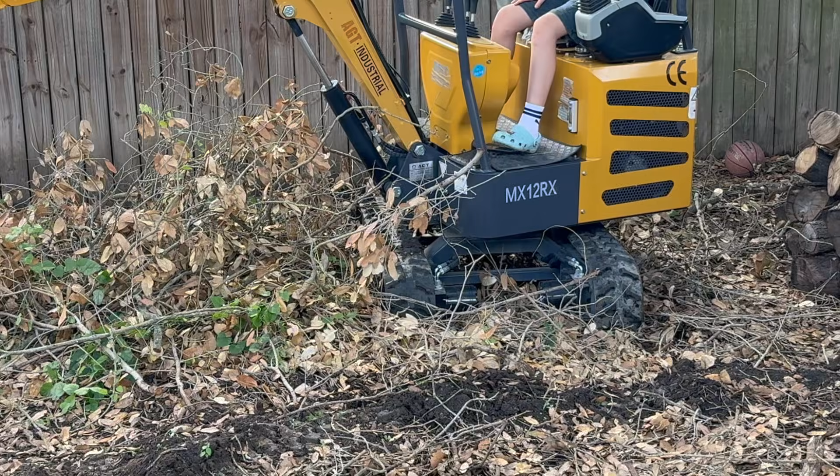All was going well with my cheap Chinese mini-excavator until... And it's spraying. See where I get our newest asset operational again,

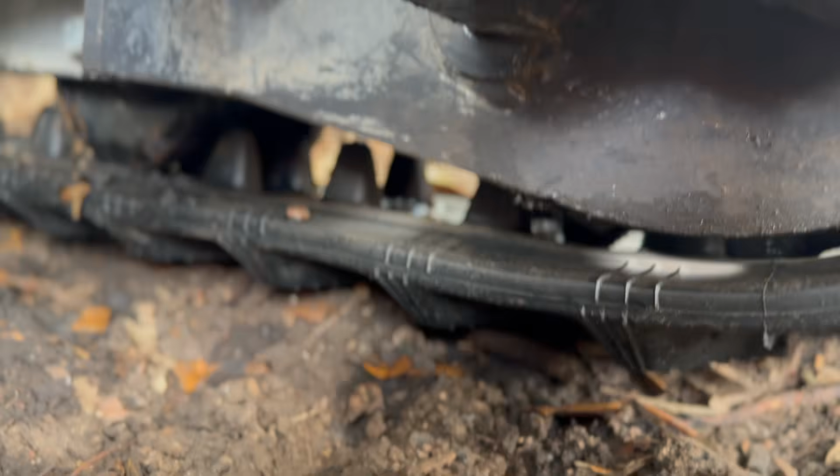With the only technical guidance coming from poorly assembled Chinese instruction manuals and disjointed tribal knowledge passed through Facebook groups, I completely disregarded the post-purchase instructions and immediately let my son play with it. He just pushed it away. With only 2 hours on the hobbs, it started trying to return all of the hydraulic fluid back to the earth via one of the track drive motors.

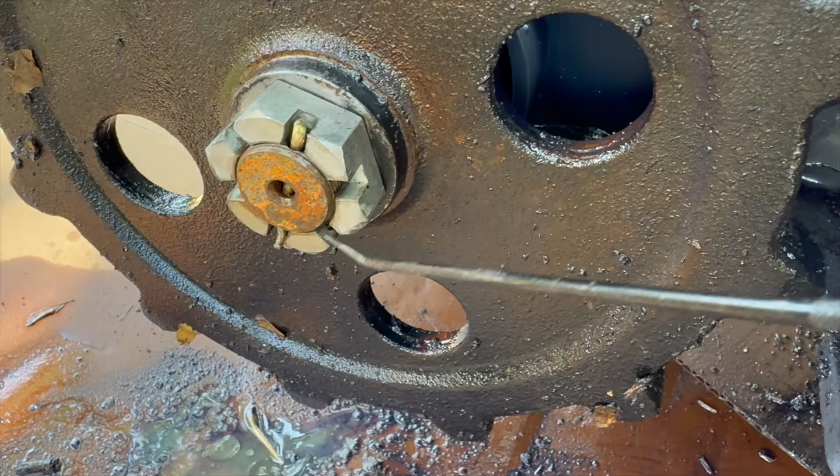That's probably not good. After loosening up the track adjuster and pulling off the track, I started to notice some assembly issues that even had the chickens scratching their heads. This whole thing right here is not bolted down by anything. Yep, no grease zerk there either. If you're trying to think about the right way to do it, it's probably snug plus one castellation. Much better than the factory done with not snug

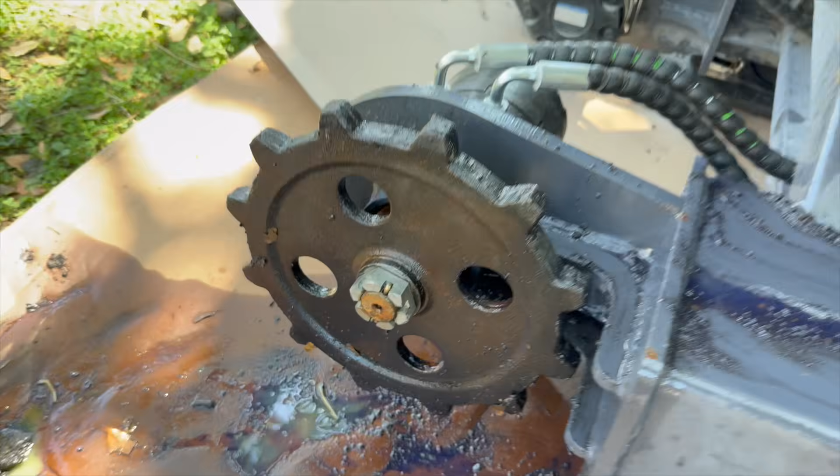at all. Alright, I did not do anything to this except take the nut off, and it looks like it's not press fit on, so that guy just came off by hand. Oh, the keyway is coming out with it. So there's where the oil's gonna be coming from because of the internal seal. Let's fire it up and do a little test.

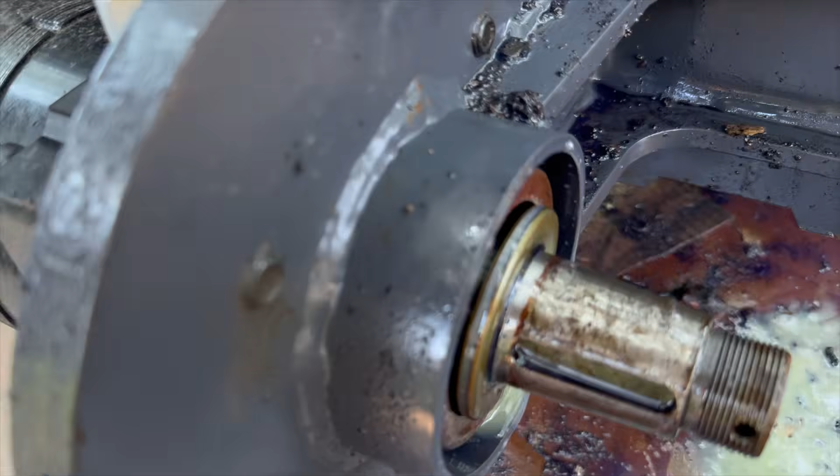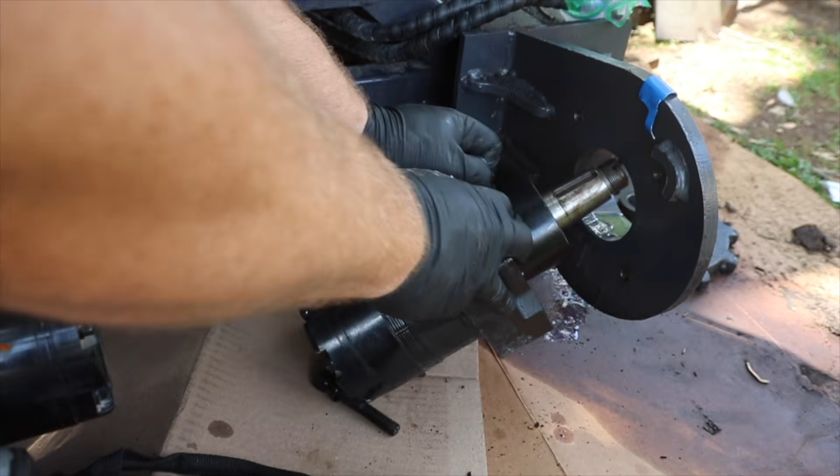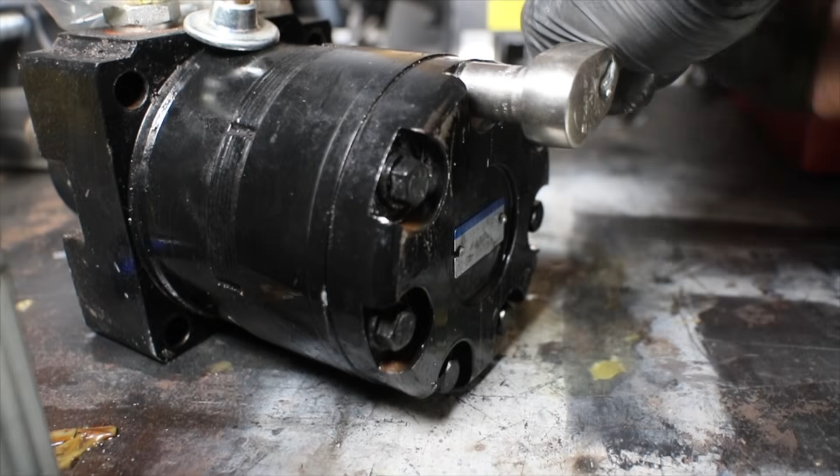At this point, my working theory about the cause is that the internal seal blows out when the dust cover is unsupported by a loose track drive sprocket. We'll check that out more whenever we get it off and get it into the garage. The drive motor in question is the BMER-2-350 wheel drive motor made by some factory in China. Disassembly starts on the back side by finding a surprisingly consistent torque on all of the housing bolts.

Now we're going to play a little game called How Much Hydraulic Fluid is Really in the Pump. My guess is a lot. Look, I was right. I win.

What did you win, Johnny? Cleaning up after yourself. That's what he wins.

Let's go backwards real quick. It was at this point I decided to mark the sections so I can make sure to orient them the same way. With my paint marks applied, the back half comes back off right before the shaft popped out with a very satisfying... Oh wow, look at all that corrosion. If your dust seal is still partially installed, removing it when the shaft is already out is a lot simpler. Removing the C-clip is not necessary, unless your bearing, shown here, is damaged.

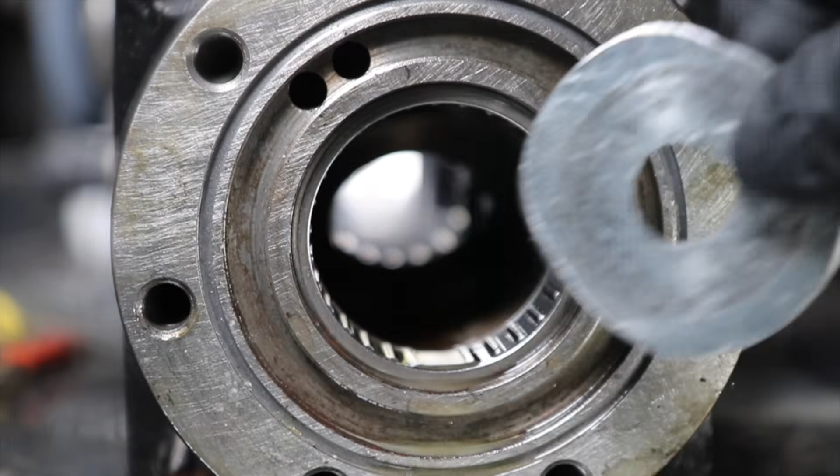Right in there is the failure. So it looks like it'll just squish out a little bit of the seal. Alright, so we'll work on getting this bearing right here out. I happen to already own one of these Harbor Freight engine supports, so it makes sense that the cheap Chinese engine support washer should fit in my cheap Chinese track drive motor perfectly. I ground off the edges of a second washer to pass through the bearing cage.

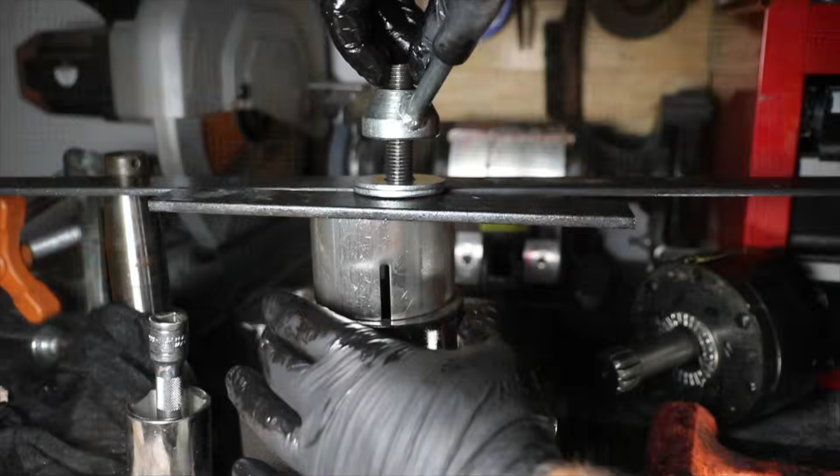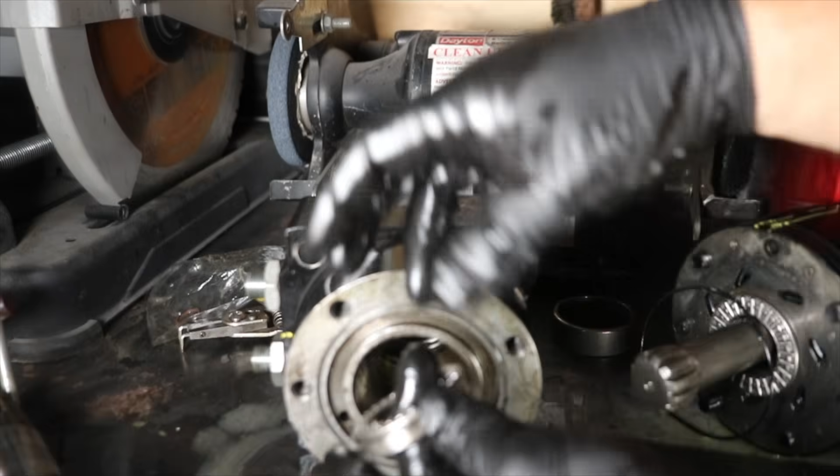My makeshift bearing puller did a great job, but finally being able to use that one piece of 3-inch exhaust I've been holding onto for over a year, that felt even better. Does not look like it damaged it in any way. HK5020. And then we have these three here. This is the star of the show and why we're all here.

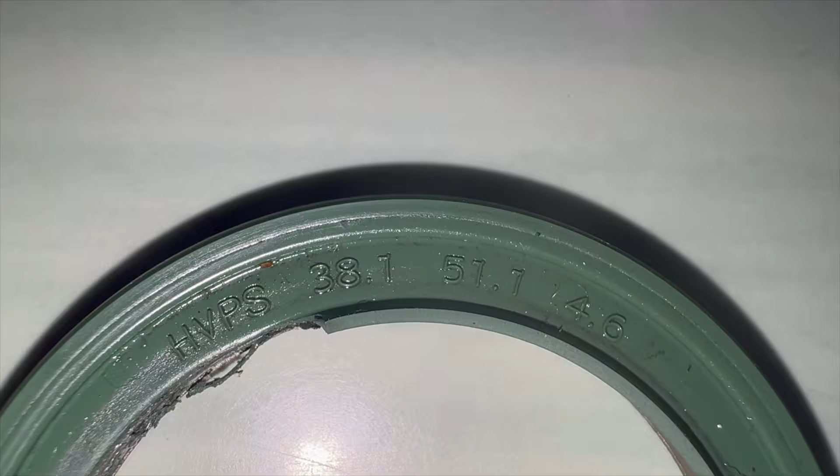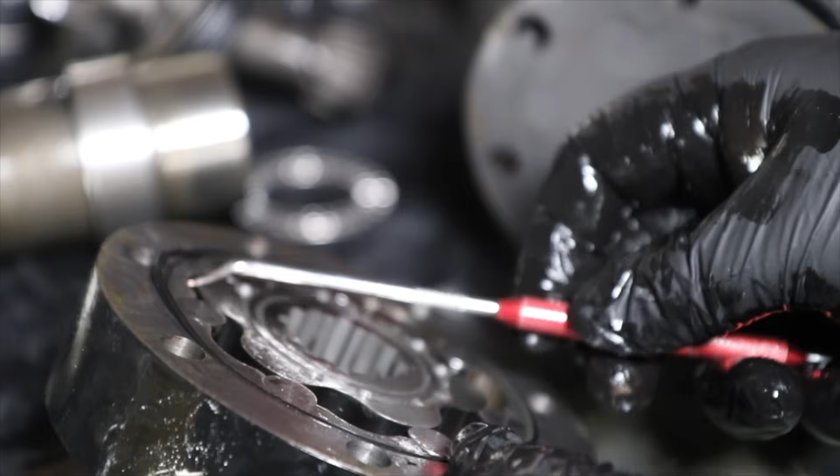Those numbers after the HVPS are the measurements of the seal in millimeters, but there isn't a part number on it, nor are there any part numbers on any of the other seals or parts in this motor for that matter. This has resulted in dozens of internet groups being flooded with help requests as their BMER drive motors try to irrigate countless backyard projects with hydraulic fluid. The measurements are convenient though. There are a ton of seal recommendations all over the internet, and after a little bit of internet searching, I was able to come up with a part number for a BMER-2 hydraulic seal kit.

Even though it's a brand new motor with 2 hours on the entire piece of equipment, you can see there's tons of junk already in here that needs to come out. So we'll clean this up here in a minute.

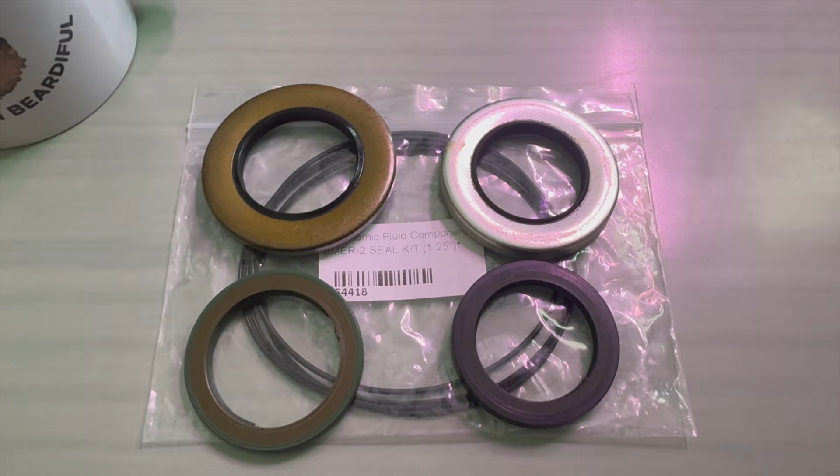Unfortunately, it wasn't quite right because the most important seals in the kit were wrong. I was unaware that there were different shaft sizes associated with this motor. So now here's real-time Brian for a little further explanation. All right, so we have all these different options here for which shaft we have as far as this motor, the BMER 350. So we are at a T31 1.5 tapered here. This is what we got going on. We come over here and we can see that this is in fact 1.5 inches in diameter.

You'd be perfectly reasonable in thinking the manufacturer's website would lead you to a manual with the relevant information. That's not the case with these cheap Chinese excavators. The manufacturer's manual has no part numbers, and the drive motor depicted is not even close to the one being disassembled on our workbench. In the time it took me to make my morning coffee, Google found this PDF from Dynamic Fluid Components, which I've linked below. After tearing everything apart and verifying the components, this is the motor we've been looking for.

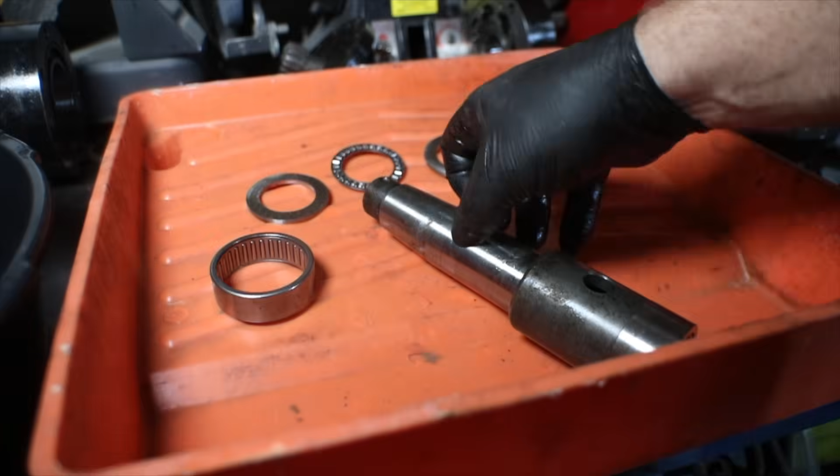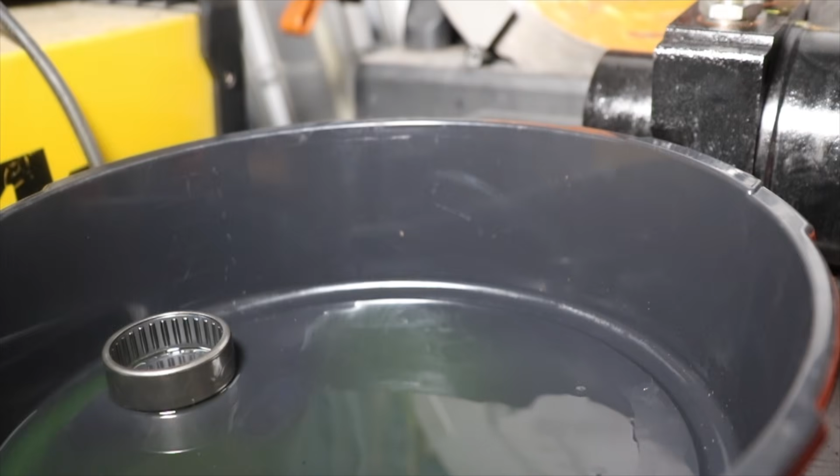I wanted to get the corrosion and trash out of the motors before setting them back in a bath of hydraulic fluid while we wait for the right seals to come in. Thanks to the magic of editing, this weeks-long process of waiting for the right parts to come in will be just a few minutes for you. But in reality, this wait resulted in the excavator being nearly completely disassembled for numerous other modifications, which are either already on the channel or coming soon, depending on when you're watching this. I have it torn apart for some other things we'll get to. We're gonna add an oil cooler and stuff. That'll be in a later video.

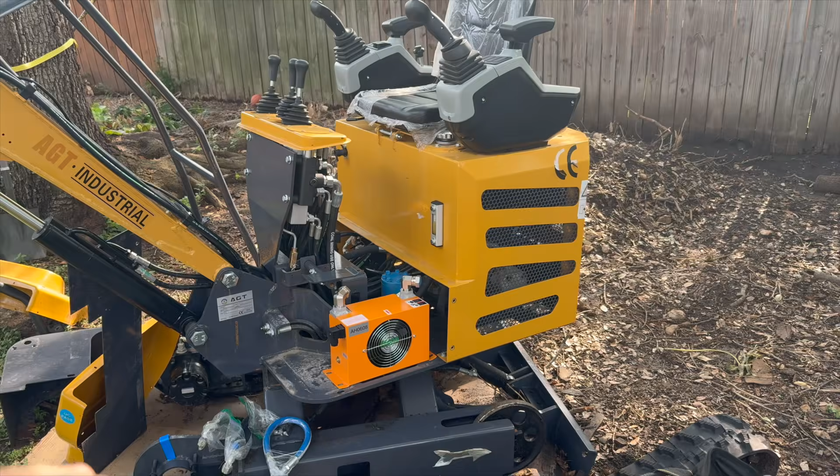So I was inspecting these guys here, and I noticed that they have some sharp lips around here, and these are the ones that ride up against that seal inside. So I'm just going to take some Scotch-Brite, nothing crazy, and just hit the edges to knock off any potential burrs. You can actually feel how rough it is sliding with the Scotch-Brite. I can feel how rough it is right around the inside of that. It may or may not be a factor, but we're going to give it every chance at success that we can. Feels a lot less threatening now.

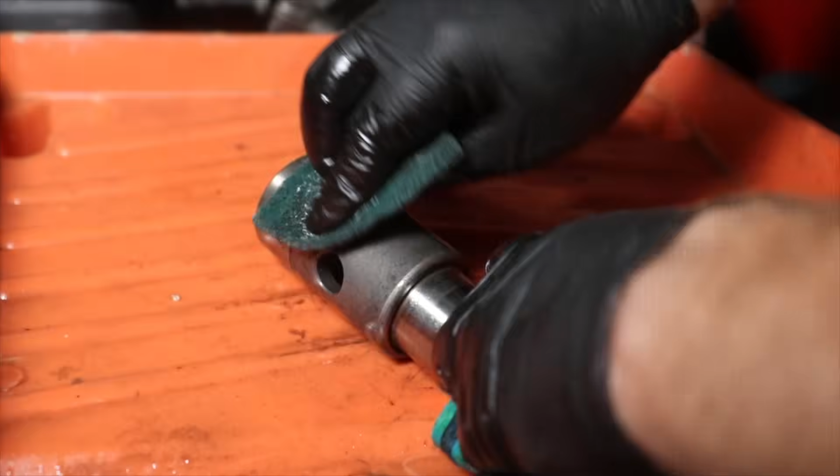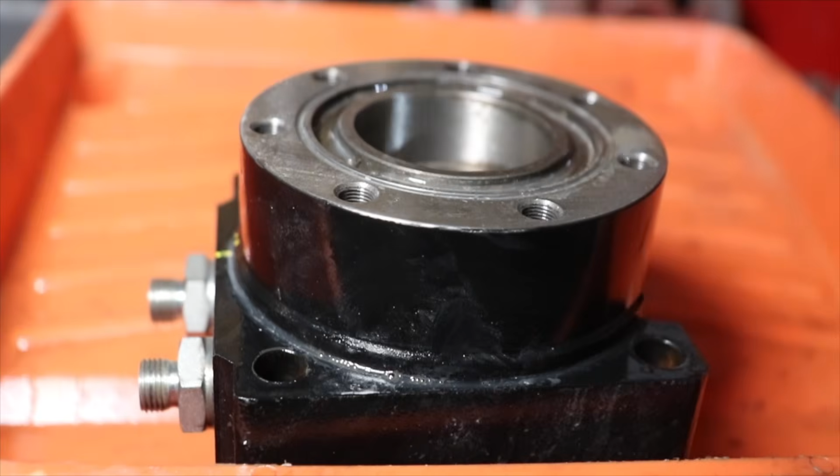After realizing I'd ordered the incorrect seal kit, I went to my local hydraulic supply shop to let the professionals use their giant O-ring sizing butt plug to determine the correct size. None of which they had in stock because the seals are not all round and they're metric, things that are not common, I've learned. I decided to go to the source. I called Dynamic Fluid Components Inc., located right in South Carolina, to figure out why their seal kit didn't fit.

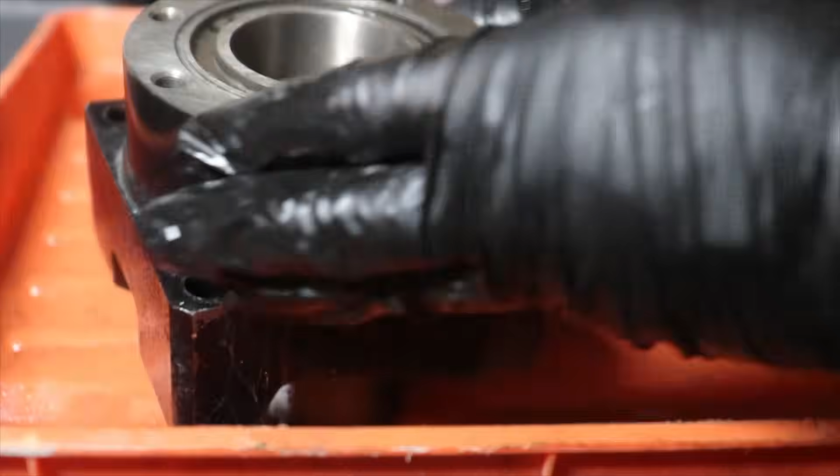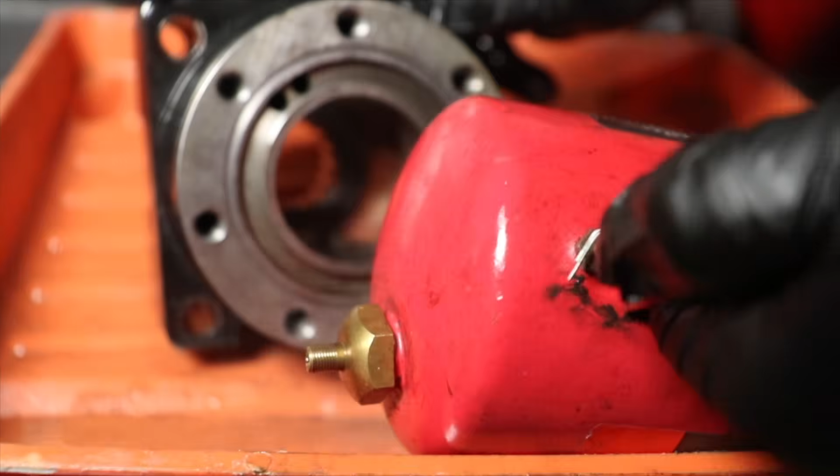Now, for those of you who were eagle-eyed, you'll notice that I ordered a kit for a 1 1/4 inch shaft when the shaft that I have is an impressive 1/4 inch thicker. So that's the seal kit we're going to need to order. Not the 1 1/4 inch, which Surplus Center has. That one won't fit. Good job. After the representative at Dynamic helped me figure that out, he put me in contact with one of their dealers to order the correct kit with a part number of BMER-2 Seal Kit 1.5 inch. Yeah, I wish I would have realized that before I ordered 2 of the wrong kits.

With everything cleaned and all the rough edges smoothed over with a Scotch-Brite pad, I put everything in a hydraulic oil bath to prevent corrosion while we locate a seal.

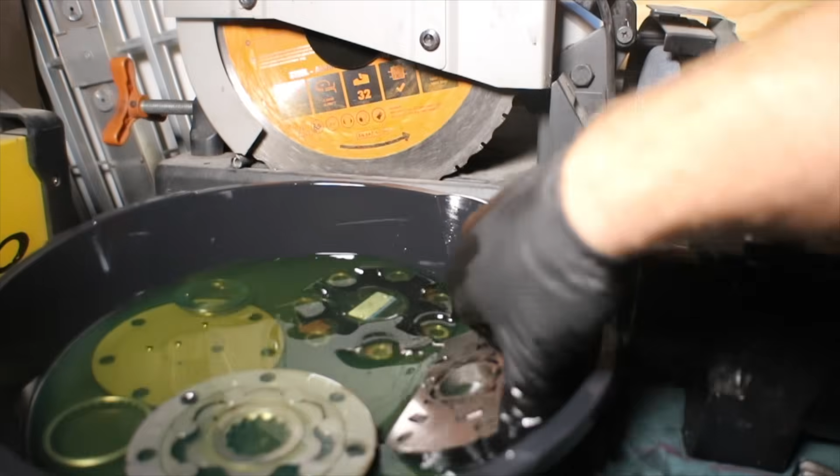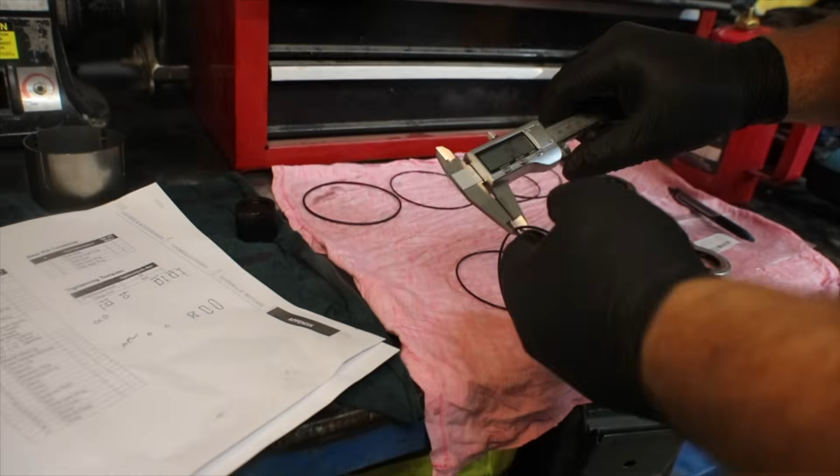64414 for the 1.5 inch. Let's go ahead and measure all these, make sure they're going to fit before we start assembling. I measured every single seal that came out of the motor and compared those measurements to what was in the BMR 1.5 inch seal kit from Fluid Dynamics.

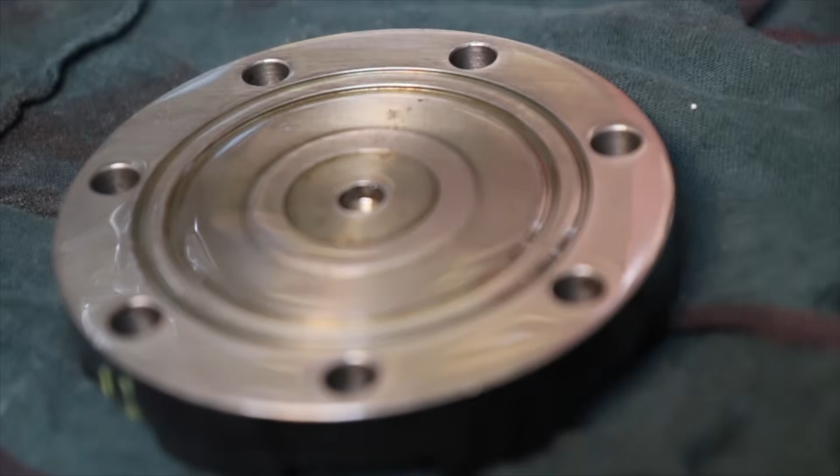The housing seals all fit perfectly, and I had no doubt, even though they were slightly different shape than what came out of the motor, that they would work. Even the replacement dust seal was the right size. After several rebuilds, none of them have leaked.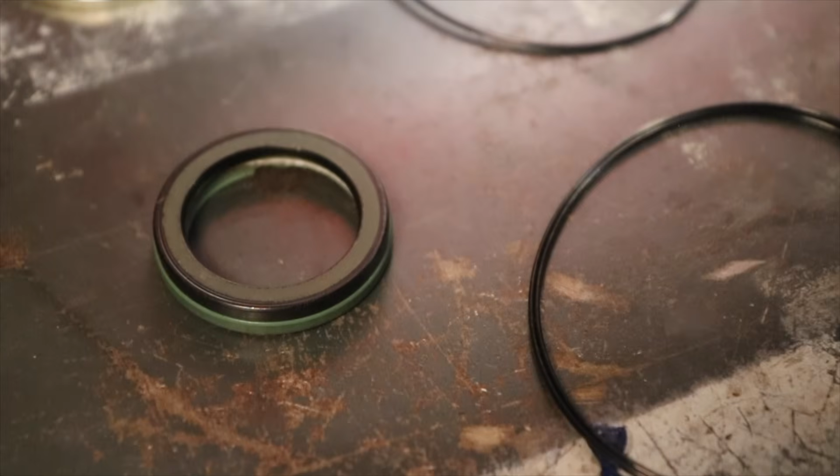Spoiler alert, this didn't go as smoothly as I would have hoped because the internal seal from this kit was still not correct. Well, unfortunately, doesn't quite fit. See that gap around the back of the seal? Alright, it's time to see what is inside of this guy.

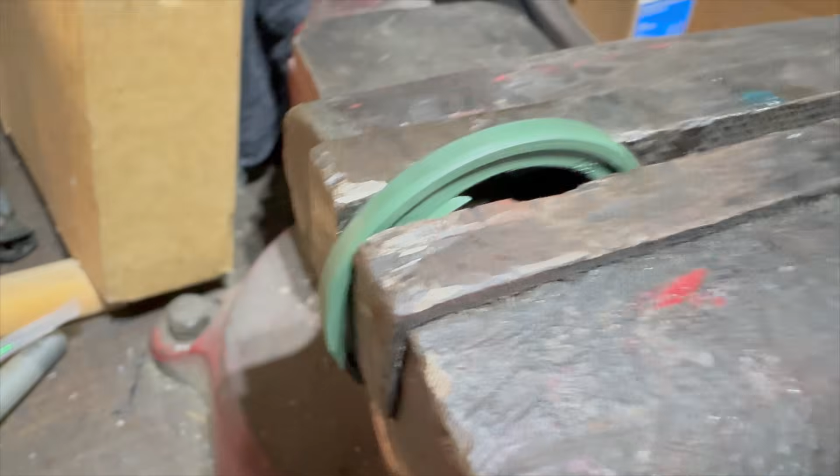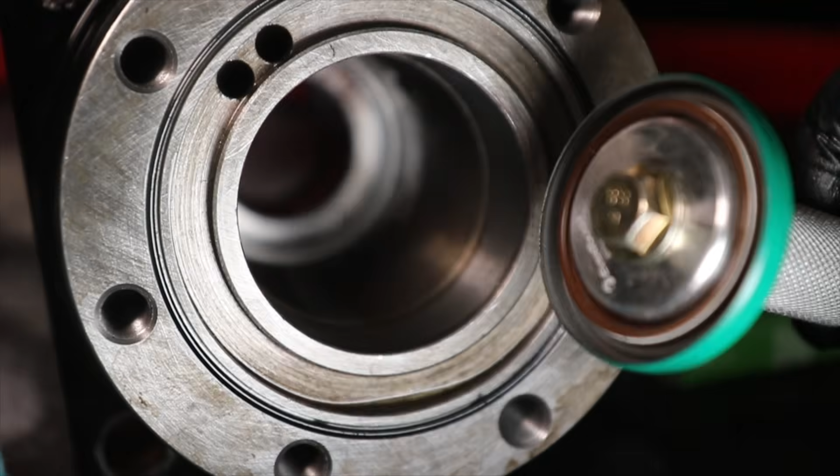Out of all the seals that have been suggested by the internet, none had looked anywhere near the right profile. There's the profile. I ordered the closest internet recommended seal and decided I'd try another experiment to settle a little dispute I had in my head. The idea is, since the dust seal is held in pretty loosely, it could use a collar to hold it in more securely.

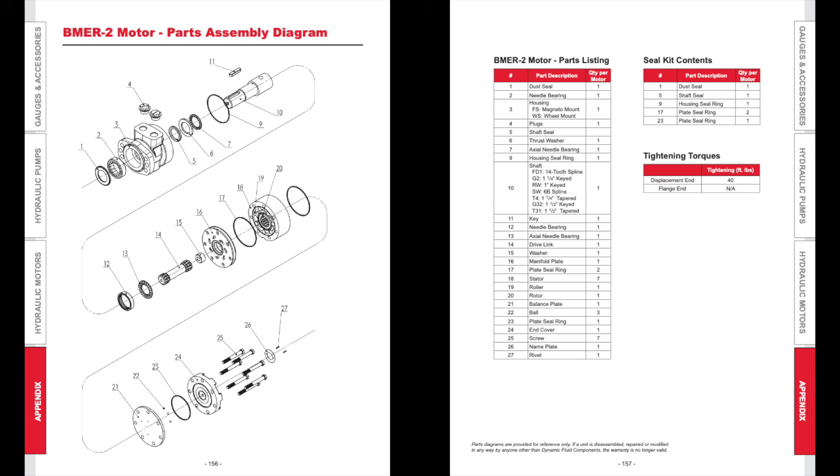For this attempt at assembling the motor, I used an SKF seal recommended by the internet and assembled the drive motor using the illustrated parts breakdown from the Dynamic Fluid Components motor because the internals looked identical. I included a link below to the illustrated parts breakdown and videoed the assembly here. The most difficult part has to do with the check balls, but if you look closely at the IPB, you can get a pretty good idea of their orientation.

It may be clear to you by now that I don't have a press. It is probably not that expensive to get a Chinesium model from Harbor Freight, but I was able to reliably do most of this work with pieces of all-thread, nuts and washers I already had laying around. A vise and a big clamp came in handy too.

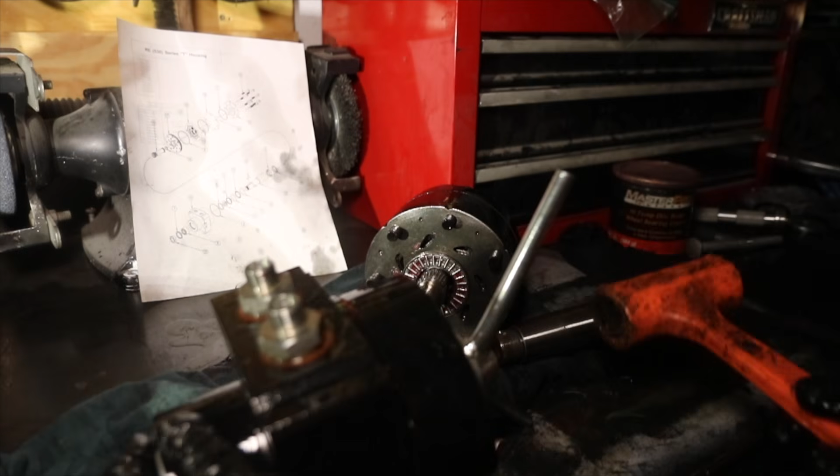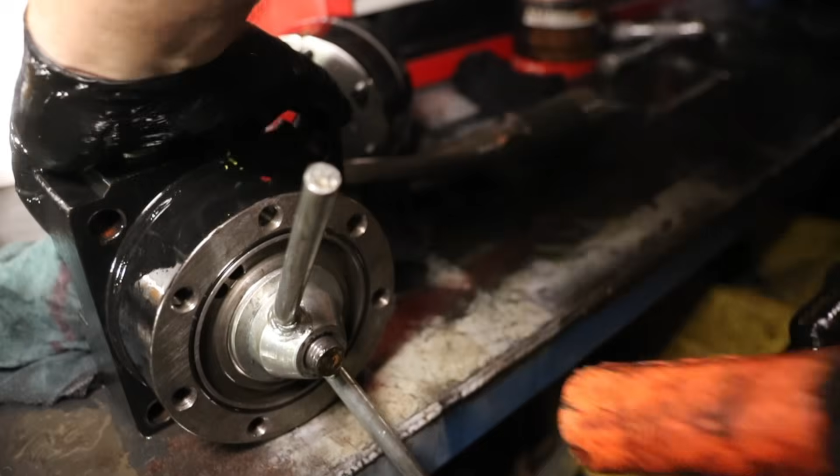The goal was to avoid buying a big new tool while also trying all the internet recommended solutions in addition to a couple of my own homebrew solutions, which you'll see coming up here in a second. So somebody mentioned that on their shaft, it was really chewed up right here, but I can feel no sharp edges, so this must not have been made on a Monday or a Friday.

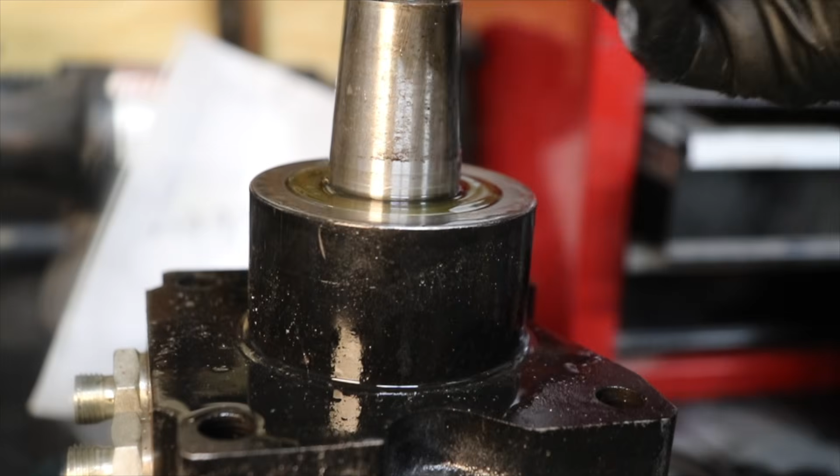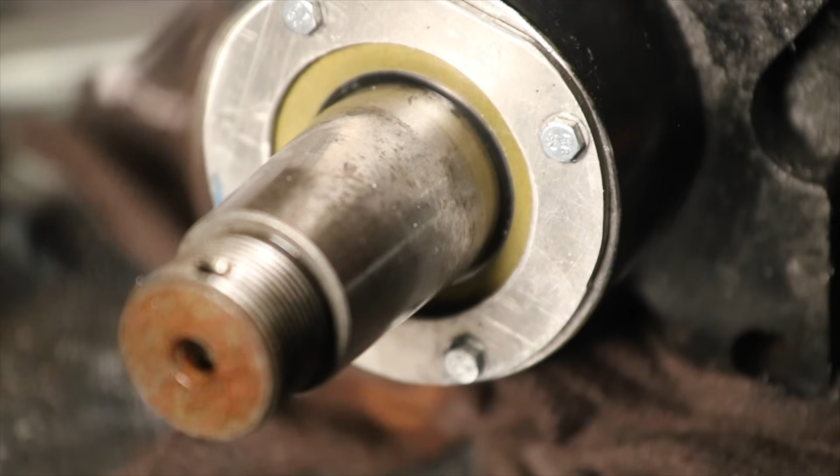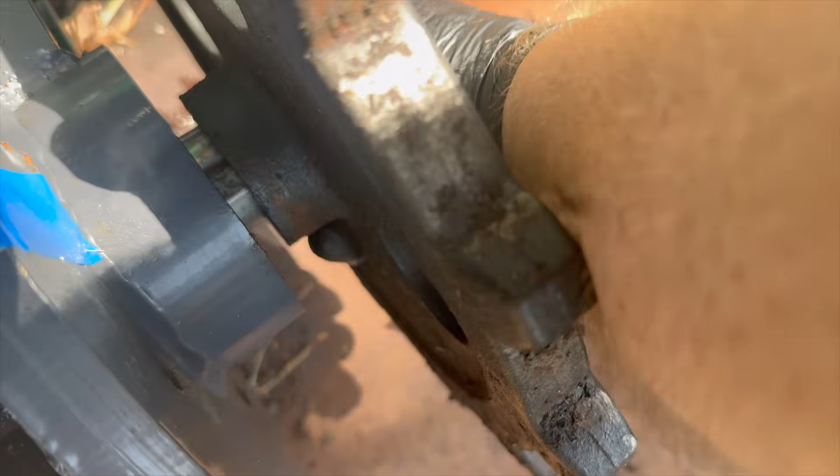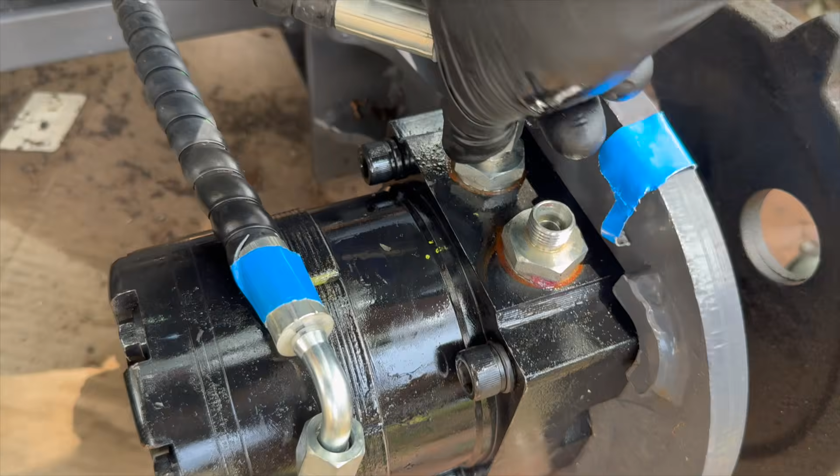With my experimental dust seal holder downer installed, it's time to head outside and test. I love this thing. It's a wrench, it's a hammer, it's whatever you need it to be. Oh, okay, turn the pump. That's cool. All right, it's in. Let's start it.

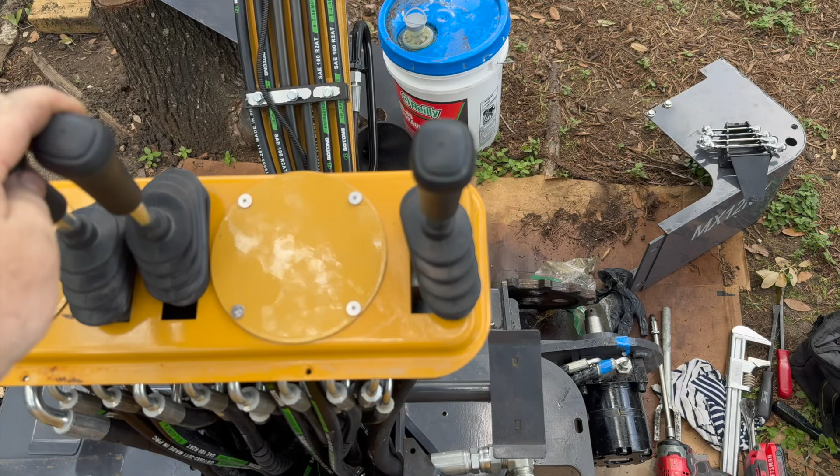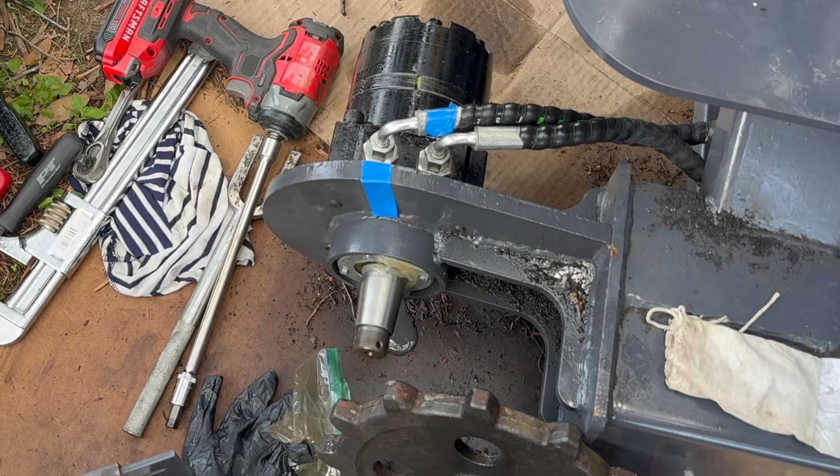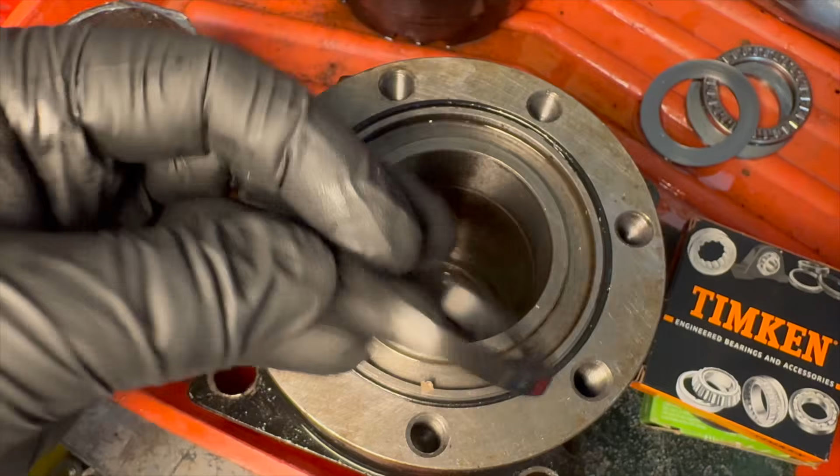With that epic failure, it was time to go back in search of another seal. Along with a group of other dedicated MX12 owners, I spent hours scouring the internet for seals that might work. And again, I opened up my wallet to an online hydraulic parts supplier only to have these three seals show up. We're going to start off with this one, which is the Timken 240319.

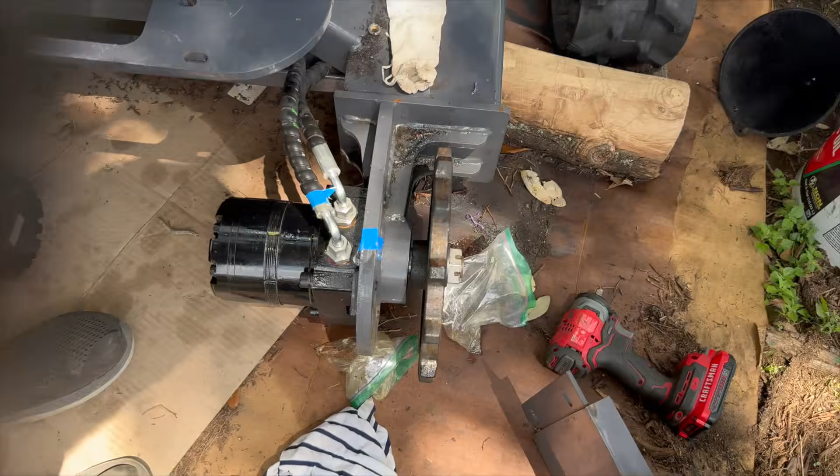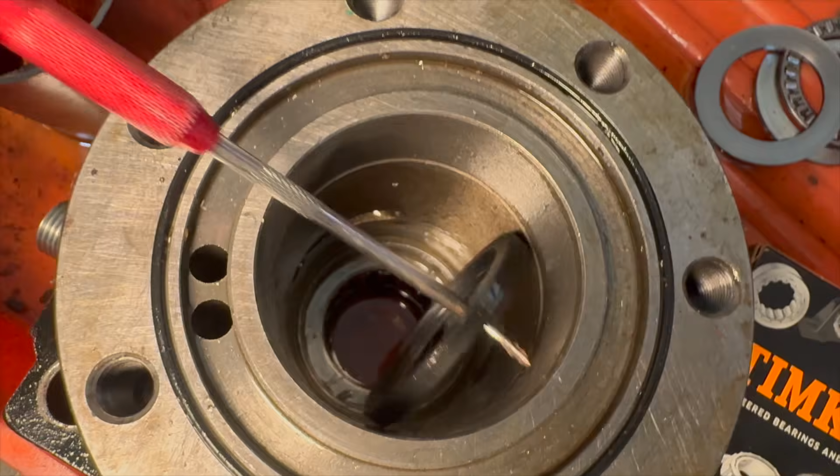And yeah, the fact that it just falls in there, that's not going to work. We should be pressing something. That one didn't work. This one's the exact same thing, 14869, they sent me the exact same thing, so that's $7 wasted.

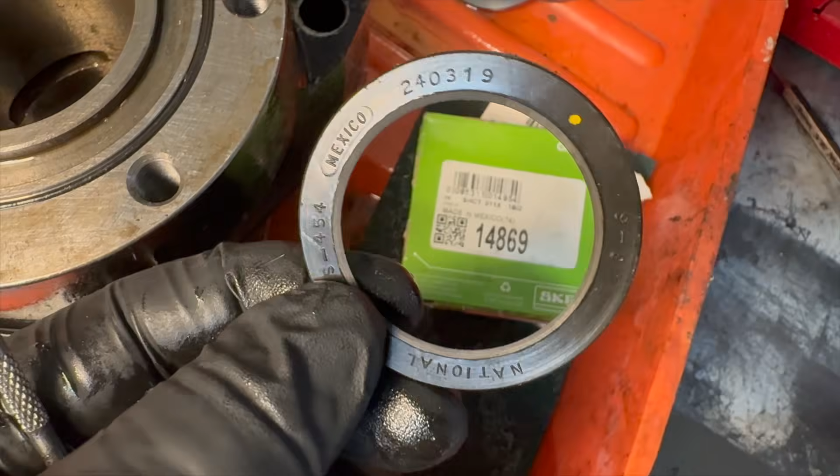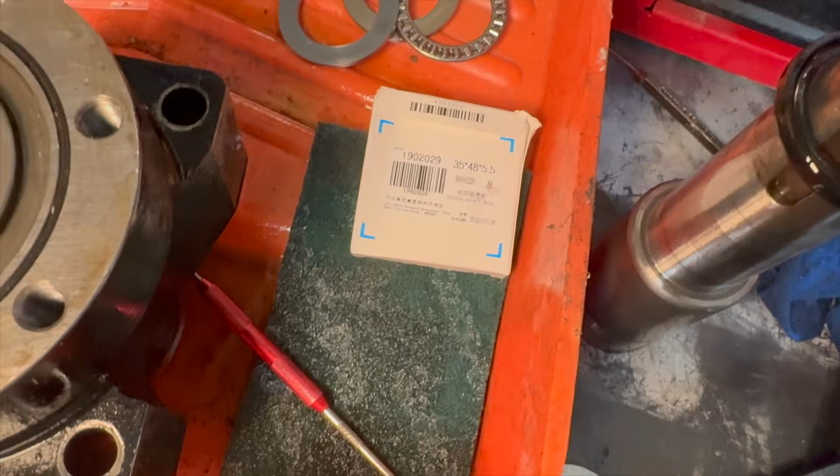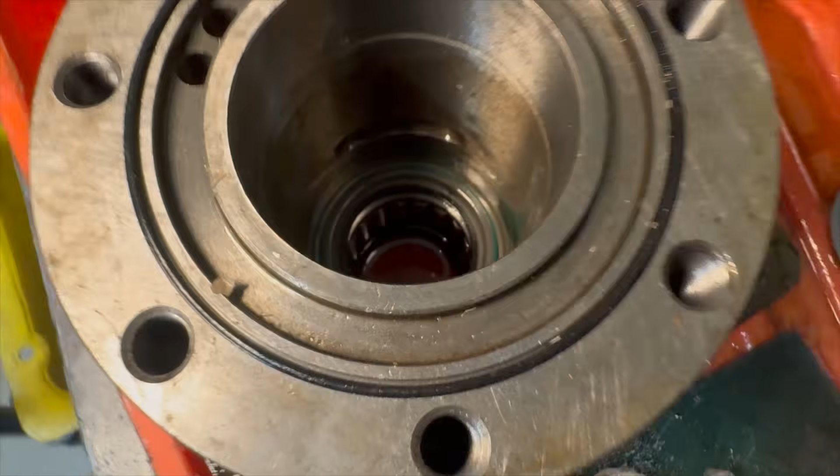Next is the John Deere M127198. See if that one goes in. Well, it's promising because it doesn't just straight up fall down in the hole. John Deere M127198. Let's get some measurements.

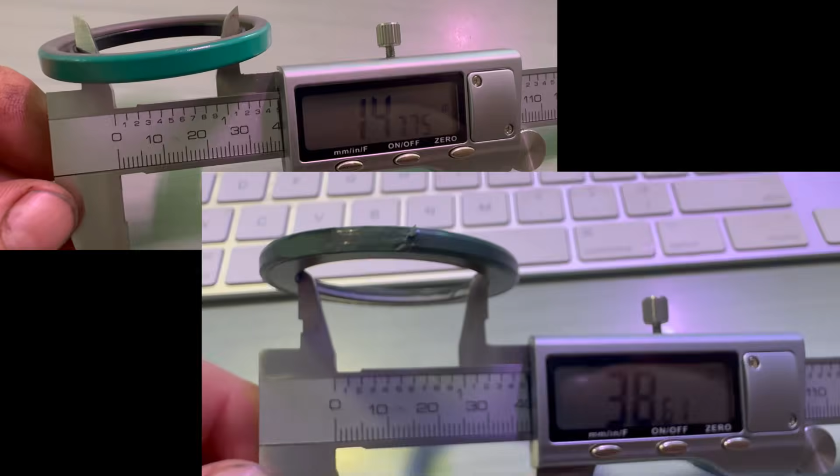Well, that didn't go well. I had pretty much had it with rebuilding this pump by this point. I had been down for weeks, and there was a bunch of talk about replacement motors that could be found on eBay. So I searched for a BMER 350 motor with a T41 hydraulic shaft, and with a click, my wallet was once again much lighter. I ordered two because, well, foreshadowing.

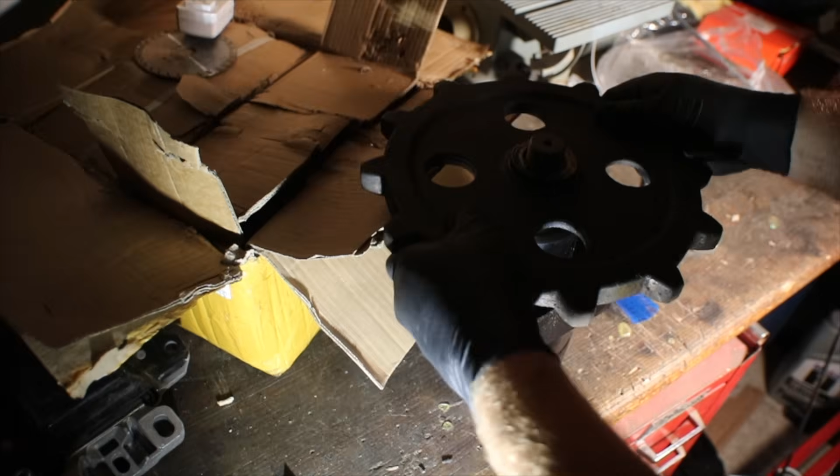Out of the box, everything looked promising, and I only needed to swap over the fittings, but first I wanted to make sure that it would fit the sprocket. This is the actual one that I bought for my machine, and it worked out great. Once again, foreshadowing.

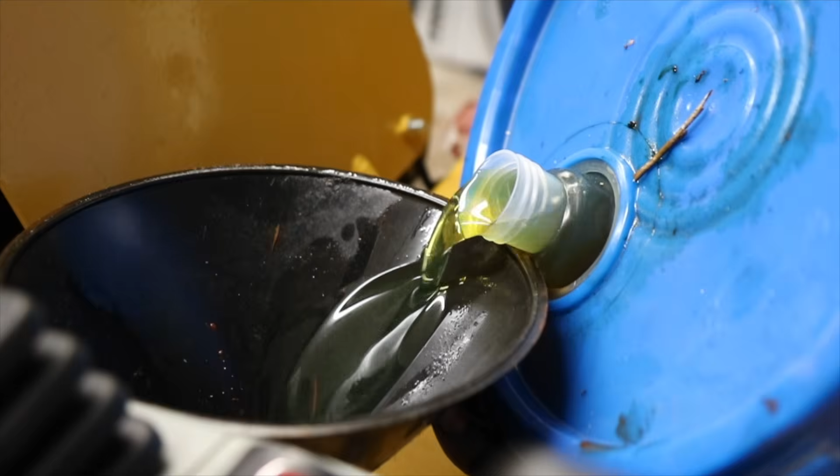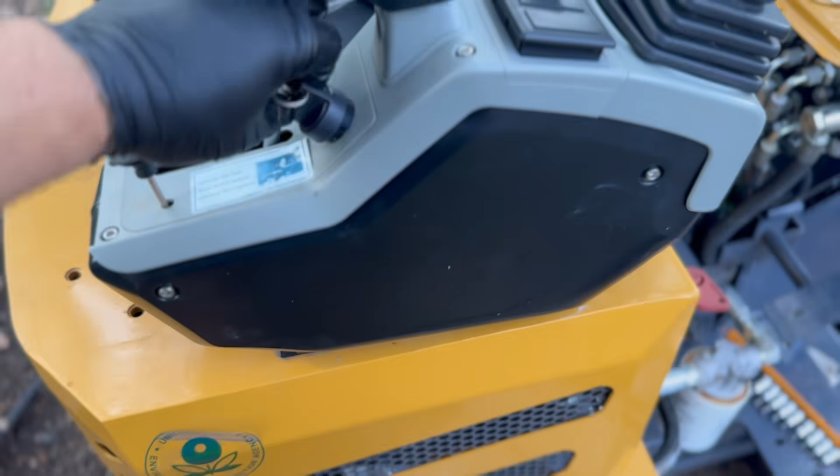Alright, she's been sitting for a little bit, so let's see what happens. Fired right up, that's awesome. Hydraulics back on. This is going to be left track. Nice and easy and slow. Oh yeah. That seal didn't come out. Nice. Time to put it together.

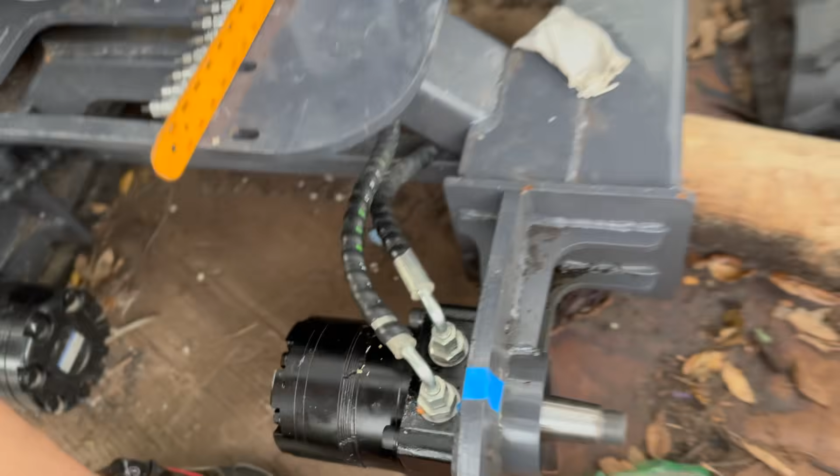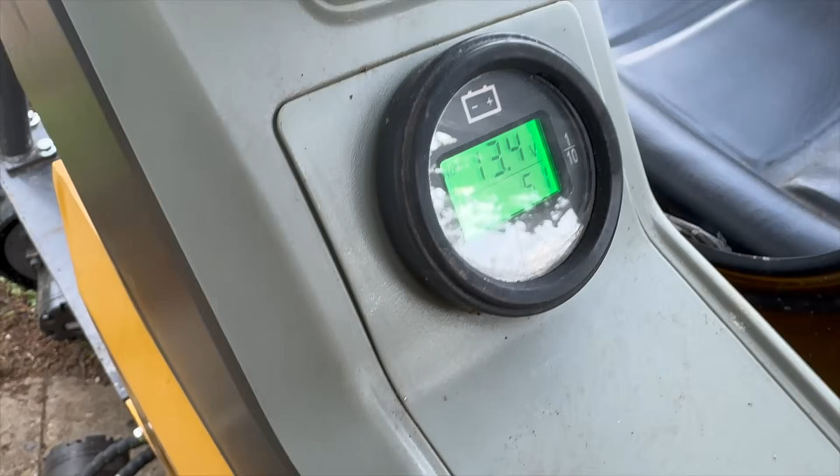Well, the second motor seal made it a whole 0.2 hours before it just completely took a dump. Literally one day. One day. And I wasn't even beating on it. Like, not really.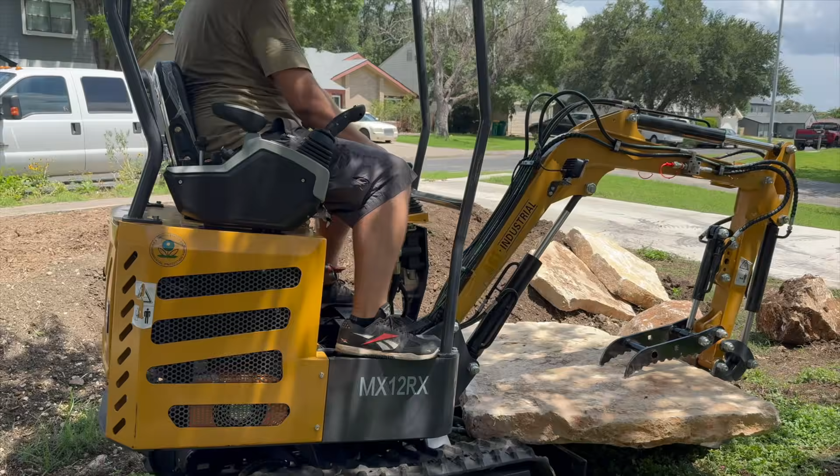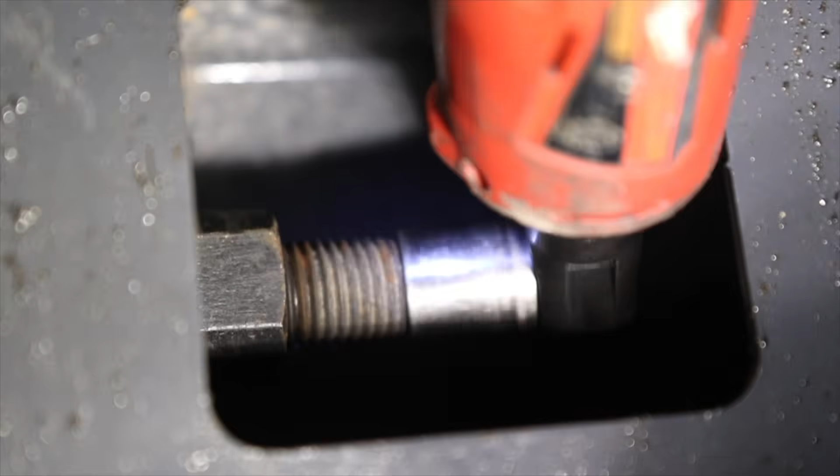This time, the right track comes off by loosening the track adjuster lock nut and then running the track tensioner bolt all the way out. Once the track is off the ground, you can cheat by removing the drive sprocket from the track drive motor instead of trying to pry the track off. Either way is not hard with the machine off the ground. Taking the sprocket off is lazier.

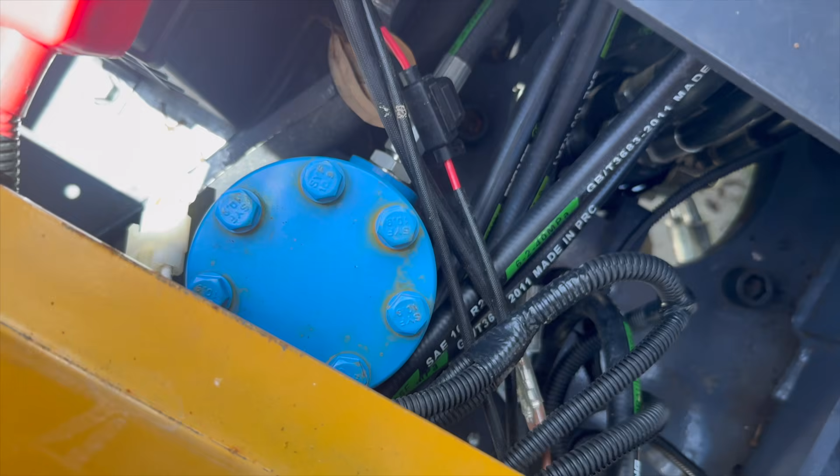For this video, though, I opted to show how easy the track comes off with the idler pulley pushed all the way on. I did, however, remove the castellated nut, last touched by the factory, entirely by hand. There are a lot of loose items to check out on these Chinese excavators, so check out my other YouTube videos for the wild things that I've found loose so far.

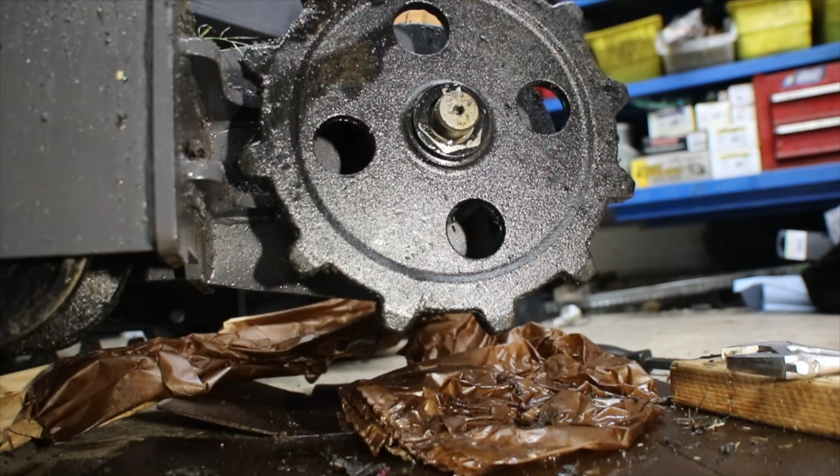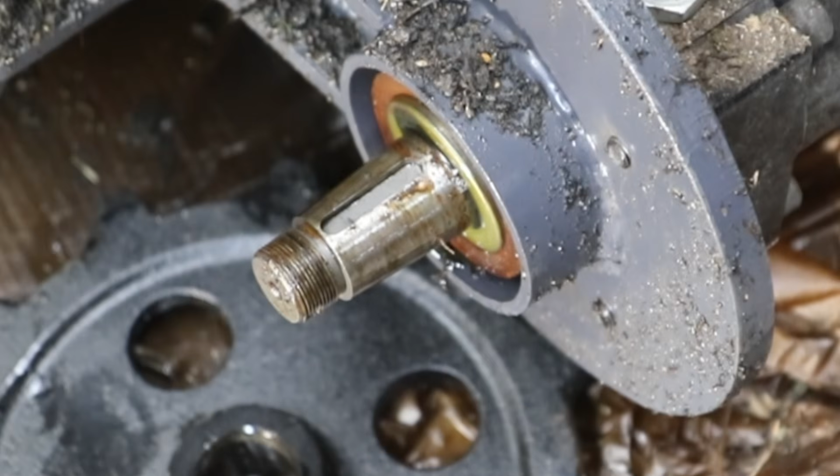With the track completely off, we can go get the sprocket out of the way with a little gentle persuasion before disconnecting the hydraulic lines and the 4 bolts holding the track drive motor to the frame. There's that classic seal pop right there. The thing I love about this little excavator is the fact that I'm doing this part in my air-conditioned 2-car garage after taking the 8 bolts that hold the canopy off.

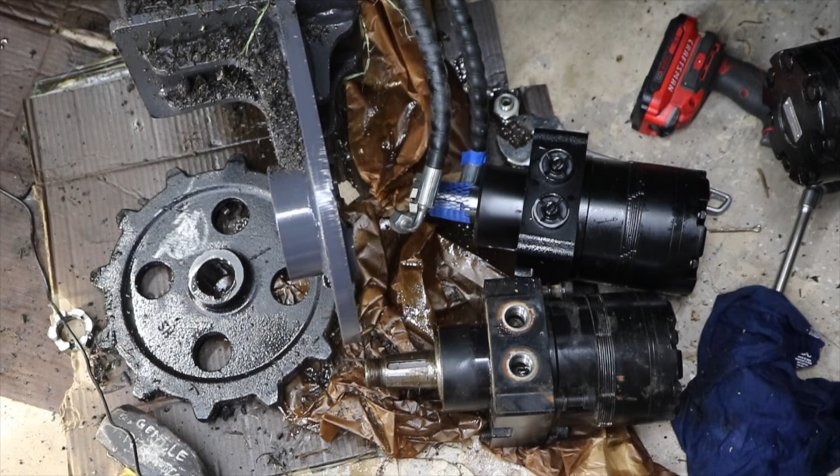I can't begin to describe how nice it is to finally get a part out of the box and have it fit after so many replacement seal failures. The interesting thing I've learned about comparing these is how this stack is in line and this stack is not in line, which I don't think means anything, but it's interesting.

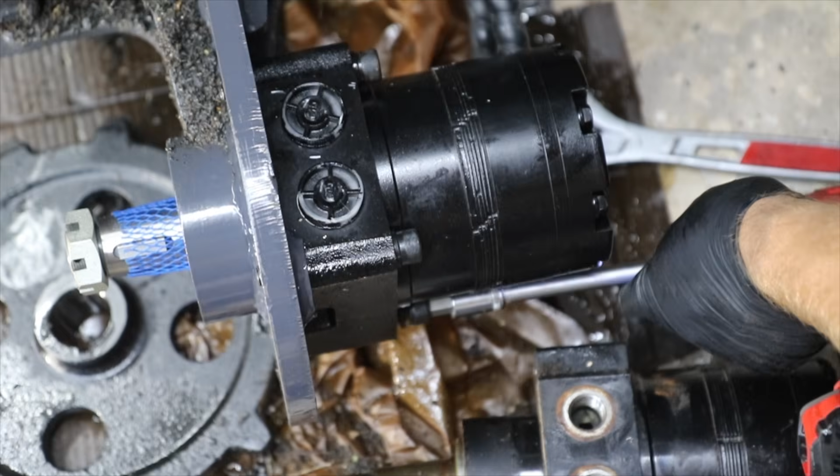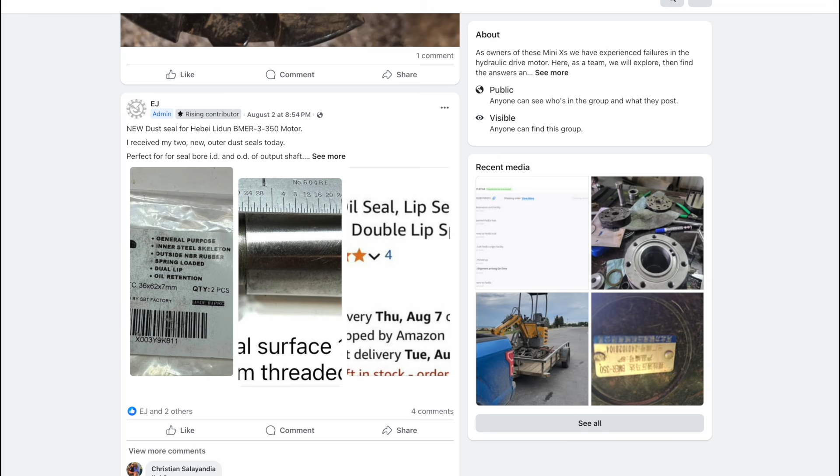These eBay motors are a great option, but there is a cheaper option, thanks to the dedication of a few clever individuals that have worked with the seal manufacturer to produce a seal that actually fits these machines for a very reasonable price. Unfortunately, I wasn't able to get the seals before this video came out, but that video will be on this channel right up here. I do highly recommend getting a line wrench set. It helps prevent rounding off the line nuts and helps get them nice and tight.

The sprocket nut should be snug plus one castellation. As for the track tension, it's more of a feeling. However, this clip should give you a pretty good idea of the correct tension. Too loose is annoying because the track will continue to fall off, and too tight you'll start destroying components. So err on the side of just loose enough not to fall off.

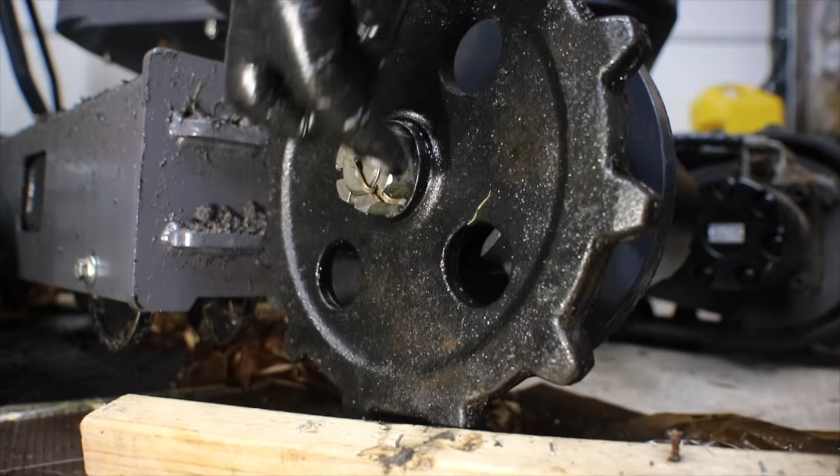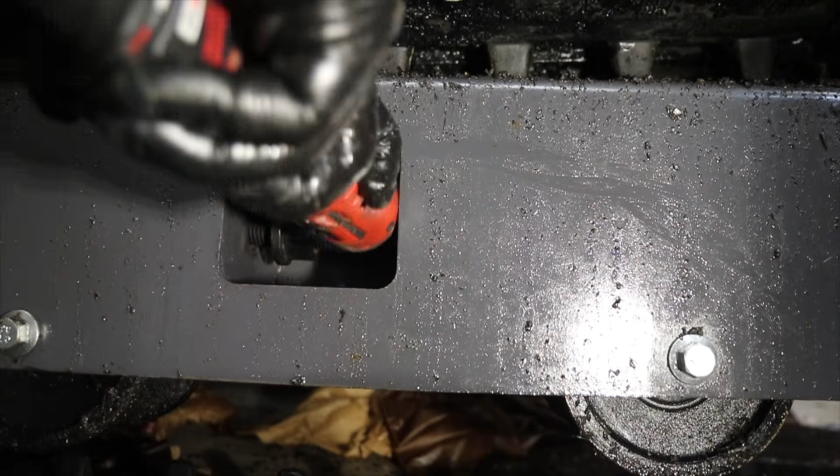I do want to point out how prone to tipping over these small excavators are, and my son experienced this. Whoa! No! Whoa! Hey, don't jump off. It's okay. Remember, I said if anything goes wrong, just let go. All right? Hey, it's okay. Lift it back up. There you go. You're good.